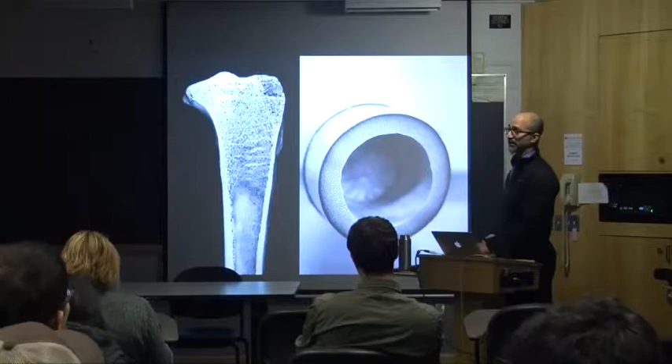So we set out to make a concrete that was variably dense. We had a number of different techniques to do that - partly using a centrifuge to change the density - but we actually ended up with a concrete that is variably dense just by pouring it. You pour it into a cast, and it establishes a variable density on its own.

That is all prelude to what I really want to talk about today, which is the urban metabolism work. The reason I show that prior work is because it became very clear to me as an architect that designers make huge decisions with huge consequences in terms of material flows. The material throughput of society that you can directly attribute to construction is about 60 to 70% of all materials that flow through society related to construction.

So designers, engineers included - how many engineers in the room, or engineering students? How many architecture students? Okay, you and me.

Designers make decisions within a context of resource flows, and it's rare that a designer really understands the full consequences of the resource flows they set in motion. As an architect, I'm very interested in that idea, and I'll return to it at the end. How do you educate designers to make decisions with an informed sense of the resource consequences, not just energy, but the whole material flow?

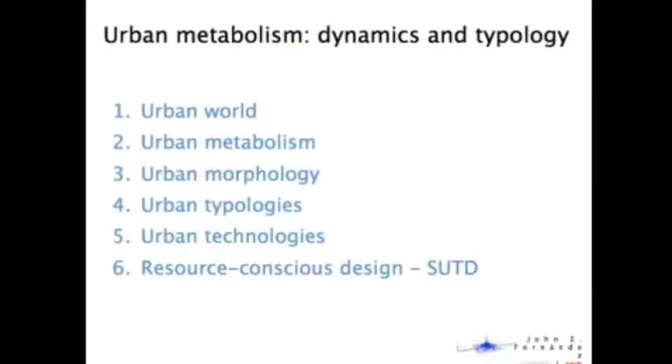There are six pieces to this presentation. I've got 78 slides or so, and I tend to move through them pretty quickly, so I want to spend just 45 minutes on the talk.

The first is the context of the urban world, and the motivation behind the work we're doing. Urban metabolism I'll introduce as the framework for the work I'm going to show today. Then I'll talk about two main projects, starting with urban morphology—how do you link urban form to resource flows?

The second project asks: do we have city types? Are there cities that are like one another? Can we derive a typology of cities based on their urban resource consumption? That'll be the second big project. I'll also talk a little about urban technologies, and the last piece is about education—a project I've been involved in for the last 4 years in Singapore.

First part: the urban world. Maybe some of you know this already—do you take urban planning classes? Anybody take planning or urban courses? Yeah, to some extent. Okay, so maybe you know some of this.

The increase in urban population in the 20th century, and continuing now, is just unprecedented. It's wild. The increase is also very uneven globally.

Asia, in absolute numbers of urban population increase, is really outstripping the rest of the world. This partly came out of thinking about construction—in 2005, half the construction in the world was in China, and it's pretty much continued since then. There are also significant upticks in urban population in Africa, especially in the poorest parts of the world.

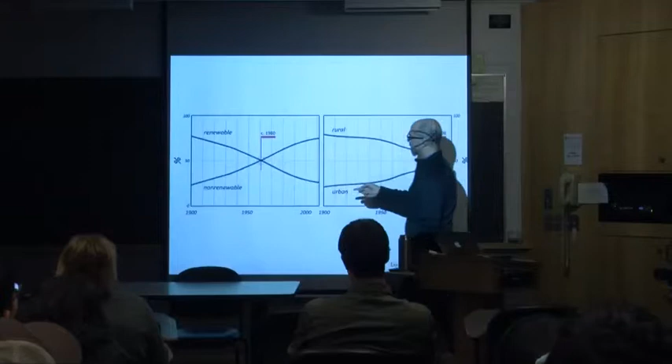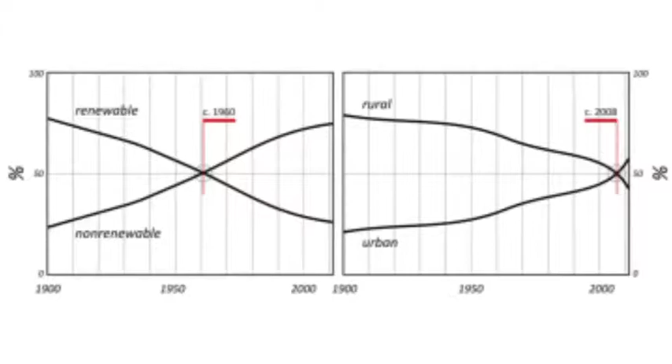We did a really extensive literature review, took about 9 months, and established that between 1900 and 2000 we crossed a threshold around 1960, where the material throughput of society—if you take all materials passing through and designate them renewable (biomass, flora, fauna) or non-renewable (metals and minerals)—shifted. We went from a substantially renewable basket of materials to a non-renewable basket today. You can argue why this happened.

A very strong element of that, I argue, and many others agree, is urbanization, because cities are made of substantially non-renewable materials—metals and minerals—infrastructure itself, buildings, all that stuff. So I wanted to really look at what this means if we're going to be adding a huge number of new city residents.

Just to give you some absolute numbers, to put this in perspective: at the beginning of the 20th century, 7.4 gigatons were extracted from Earth. That's the full weight of materials extracted from the Earth's crust. And at the end of the 20th century, about 60 gigatons—a huge increase in material extraction.

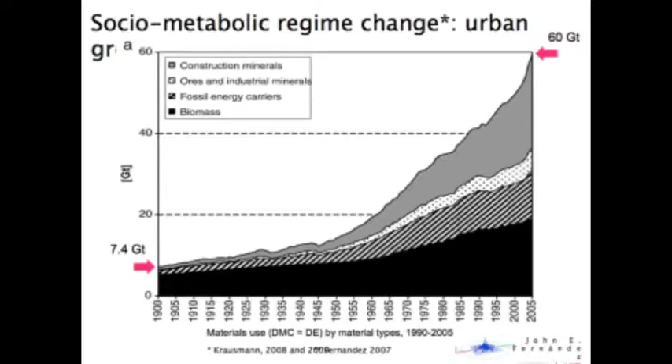If you compare that to the growth in the economy, the global economy actually dematerialized during that century. We created wealth with less and less materials over time, which is a really good thing. And that just happened—it didn't happen by any wholesale acceptance of a sustainable economy. It just happened because it's cheaper, easier, better, and technology generally drives in that direction. You develop, you're able to do more with less over time.

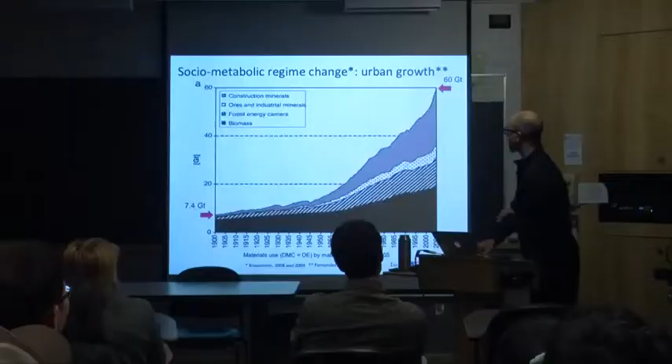So we wanted to investigate that in terms of cities. Now I've been talking a lot in terms of the globe and global dynamics and large societal dynamics, and we wanted to take that down to cities. We've been doing this work for about 5 years.

One way to think about cities is the same way we've been thinking about buildings, in terms of life cycles, in terms of lifetimes. What are the characteristic stages of the life of a city? This is quite an old diagram from 2007, but I've got a couple papers where we show this is actually happening—there are 3 stages in urbanization.

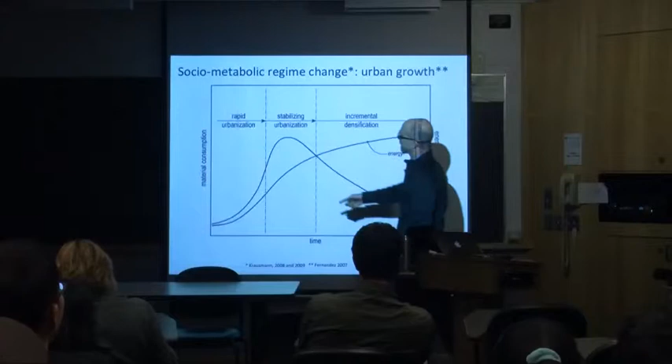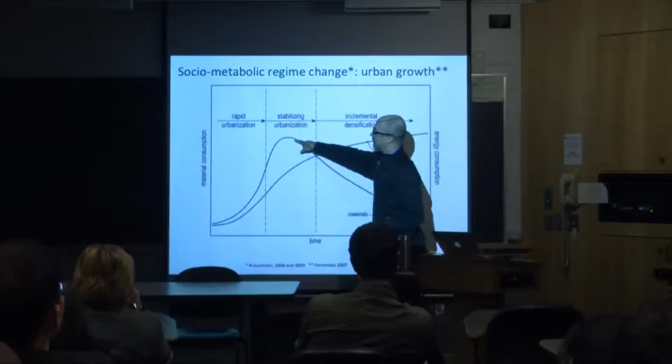A lot of it's common sense, but the first stage is rapid urbanization, or the founding of the city and the building of it—huge material input, and the associated energy increase as more people move to the city and it expands. Then there's a second stage, a stabilizing stage, where the physical extent of the city and the population stabilize, plateau, and the material input is still non-zero but it can plateau—it plateaus and then goes down.

The example I like to give is central Paris, which developed, redeveloped, was destroyed—but right now it's the way it's going to be for the next few hundred years. You're not going to see skyscrapers in the middle of Paris, right? So the population is pretty much stable—actually depopulated, like a lot of wealthier city centers, unfortunately. But the population is fairly stable, which means the material input, the actual amount of material put into that space, is decreasing over time.

Then the third stage is incremental densification, where the city just fills in the gaps. So I've described mostly material here, and what happens with energy is different—energy increases, and it increases through the stabilizing stage.

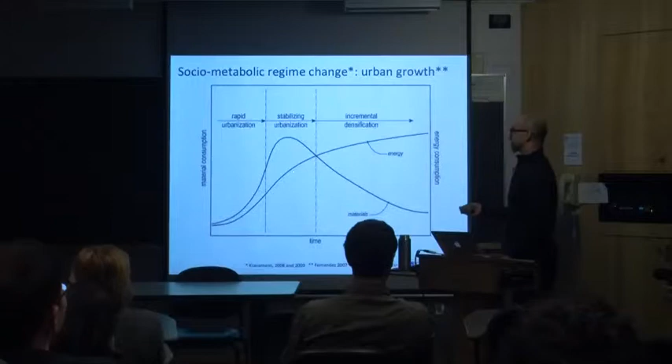The reason this happens is energy continues to increase when material decreases, because if the city is healthy—and that's the assumption here—and the population is stable, the city is doing what it does best. Every city does one thing best, and that is create wealth, create affluence. So as you create affluence, energy consumption almost always increases. In fact, it always does increase—we're not finding any examples where it decreases, really.

So energy increases, and maybe it doesn't plateau. I just want to add an addendum to that: just very recently, a colleague, Chris Kennedy at University of Toronto, has found some evidence for some Northern European cities being able to actually decrease their energy consumption while maintaining their economy.

So those were the three stages, and now I'm adding a pre-urban stage and a transition stage. The pre-urban stage is before the city, when you have hinterland production. The hinterland is the area or region from which the city draws resources, and hinterland production is highest when there's no city—no draw on it. It necessarily decreases because it's being drawn on, being degraded, as the city increases.

The last stage here is what everybody talks about: sustainable cities. How do we make that transition so that energy comes down, water comes down, and materials come down?

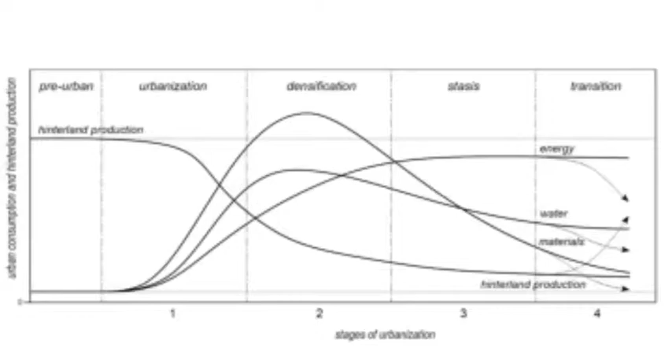Okay, so that's the whole prelude to urban metabolism. So you guys want to run for the hills at this point? Is this what you were expecting? Yeah, okay, all right, good.

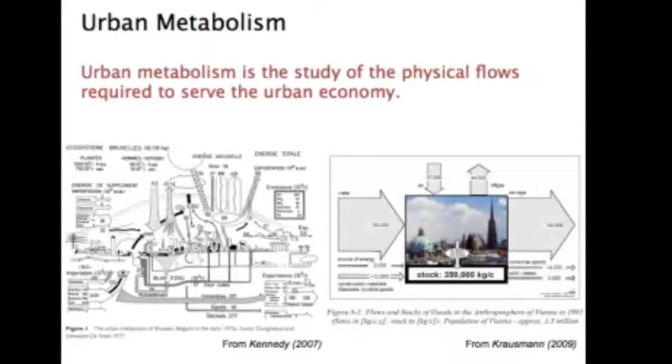So urban metabolism was a thing that we joined. It has its history back to about 1965. Abel Wolman wrote a paper in Scientific American, a thought experiment of 1 million people, and he posed the question: what do they consume? Water, biomass, whatever else. Urban metabolism came out of that as the field that studies the physical flows required to serve the urban economy. This is closely aligned with urban economics, and is basically the physical corollary to it. So what does it take to run a city?

There's a whole range of urban metabolism approaches. There's the full thermodynamic, material and energy flows approach, and then there's a more simplified version. I'd say my group, and the community in general, because there is a community of urban metabolists, is tending towards this simpler model because it's a little bit more actionable.

So some of the work we've done recently—this is just an example—is the actual urban metabolism for one year of Lisbon, Portugal. We did this a few years back. You have all of the imports, you have the additions to stock, so that's the infrastructure, buildings, anything else, and then you have the exports, the things that leave the urban system.

Just to give you some sense of the overall volume: a city like Lisbon, which is in a transition economy—and maybe it's taken a couple steps backwards in the last couple of years—but transition economy meaning it's between the agricultural, industrial, cheap labor, light manufacturing, and the service economy of industrialized cities, a person consumes about 20 tons per capita. That's very typical of a transition economy city.

Our interpretation of the master diagram, the material flow for cities, is this one. I really hesitate to put up this diagram, and I don't think I have any equations either, so at least I didn't do that. But the diagram is pretty straightforward. This is the urban economy, this is a system boundary for the urban economy, these are the inputs, and these are the outputs.

This shaded area is the socio-environmental interface. That just means the interface between the human world and the rest of the urban world. So in here is flora, fauna—literally birds and plants—and biogeochemical cycles, so rain and all the passive inputs, basically, right? Things we don't control, and passive outputs.

By the way, you guys live in a beautiful area of the country. I was just thinking today about Boulder, about this diagram. This is really intense in this part of the country. In Boston, it's not as intense, although... anyway.

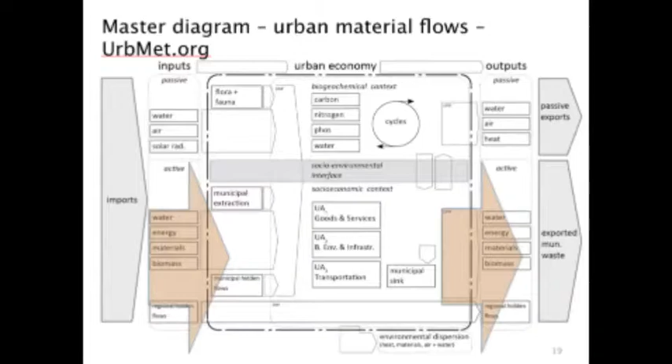The human part of the urban economy is this, so the active inputs, and all the ones you would expect: water, energy, materials, biomass. There's some regional hidden flows often. But the way to look at this human portion, the anthropogenic portion, is that, okay, so that's that economy.

And what drives this are the things that we want in a city, and these are the exact same amenities that urban economics identifies. If you've read any urban economics—Krugman, Fujita, and others—there are basically three things that cities provide, put in terms of amenities, firms, workers, and all that: goods and services, the built environment and infrastructure—urban economics makes a big point about housing—and then transportation. Urban economics says the city ideal is that as you become more urbanized, transportation costs go to zero; you can walk to work. So that's urban economics, the inputs here and the outputs there, okay?

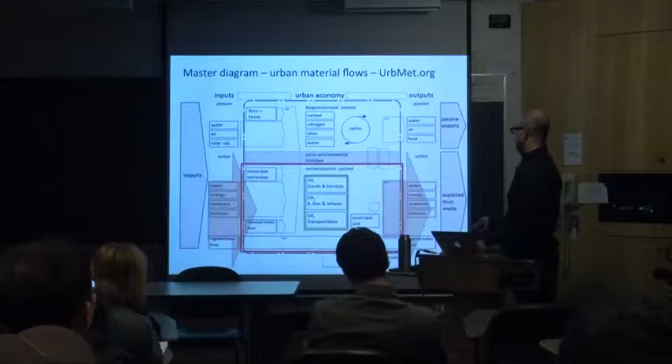So we are tying our physical flows with the financial flows already identified in urban economics. That's our diagram. As I mentioned before, the enormous resource requirements of cities regionally, nationally, and globally have to do with the fact that they add a huge amount of material that stays in place—this university, all the buildings, are going to be here for a while, right?

They're not going to go away.

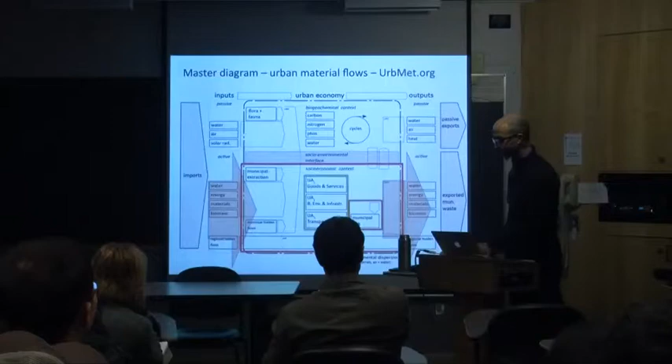A couple of different ways in which we approached a comprehensive sense of the resource requirements of cities is to begin to map the different elements of the city.

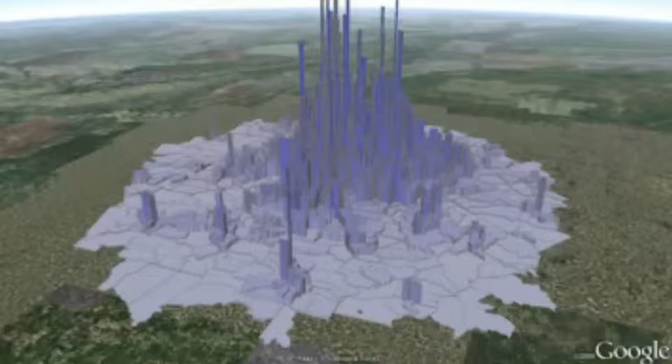What we do with that is we develop urban resource intensity maps. So this is a map of that same area in Atlanta, Georgia, about 25 to 30 kilometers in diameter, showing kilometers traveled per household to 19 services.

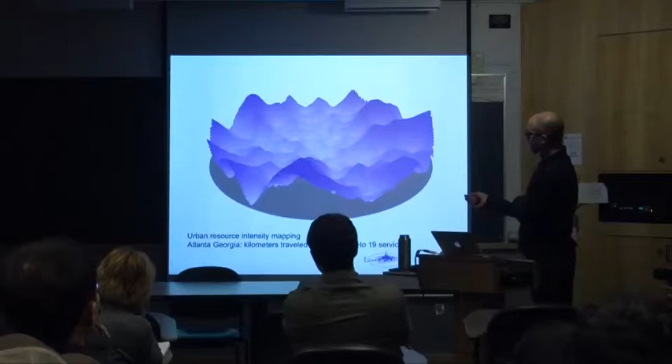The surface shows very low energy intensity in transportation in the valleys, and quite high mostly on the periphery. This is basically an inverse map showing that for denser population, your transportation energy is low. The interesting thing is that there are many areas pretty far away from the city center that have very low transportation energy.

And these are walkable districts. These are districts that have the sweet spot, the right mix of services and transportation mode choices. Okay, so that's partly what we do.

The second thing that we do is a little bit more traditional: the actual accounting for urban resources in one city. Again, this is taking those three activities - the inputs, the outputs, the urban activities driving that - the extraction from this city, and the additions to stock or the sink in the city.

And this is Singapore. Singapore is kind of a unique example that we use because it's a city-state. It's also an island, so international trade is the data that we can use, which makes it really easy compared to most other cities.

Sorry for the equation. Input plus extraction is going to equal the output plus the additions to the sink, and then the addition to stock. So the urban metabolism model basically says that this is a mass balance model. Whatever goes in comes out, right? So that's what we work with.

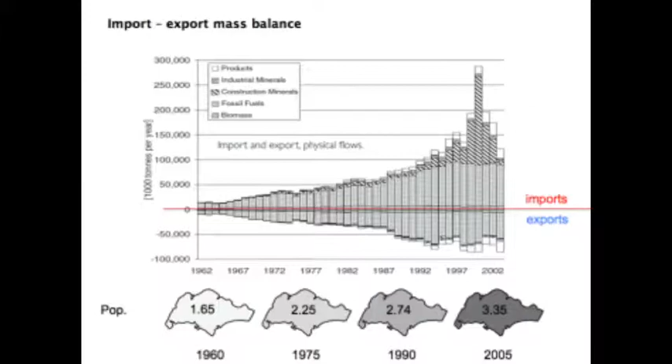Singapore is a great example also because the urbanization was, up until China started to urbanize, unprecedented. So the additions - these are imports and exports - Singapore is the first, maybe second largest oil refining city in the world. Exports have increased dramatically, but this is really an indication of economic development. Back in 1962 it was basically what was called a third world nation, and today it has the highest per capita GDP in the world.

We're developing these sorts of things because we want to be able to play out scenarios, global climate change and others. And we found a couple of things, and this is more general than just to Singapore. For example, we found that the different resources display different dynamics in terms of the growth of the city.

So this is domestic material consumption - all of the materials consumed by a city, the full basket. As the gross national income, a measure of affluence, increases, material consumption increases at some power, sometimes exponential, but at some power. Electricity almost always increases linearly.

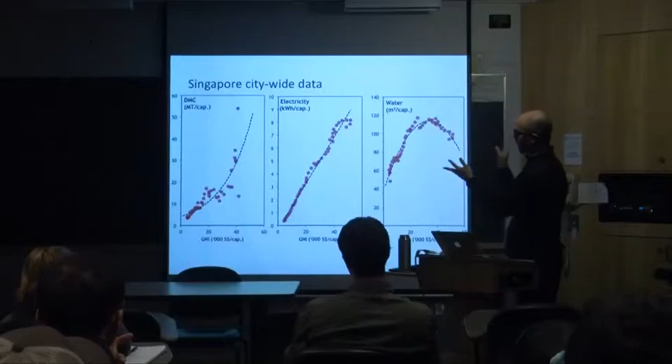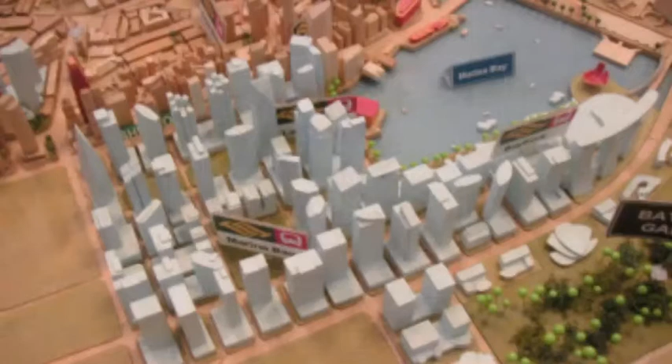Why is this important? Because in Singapore and in China and other rapidly urbanizing places - this is a model from the Urban Redevelopment Authority, showing in gray all the new construction that's planned, already approved.

Anybody been to Singapore recently? So you've seen this, the Marina Bay Sands. This is an old photograph, so this should be in brown color, but this is enormous - it's unbelievably large.

It almost, when in construction, looked like an oil refinery, frankly. It looked like a huge piece of infrastructure. This amount of infrastructure is unbelievably large. Singapore has asked us to account for the resource requirements of this sort of thing - what will it take to do this? Because they don't have any resources. They have to import 100% of the material that goes into every single one of these buildings.

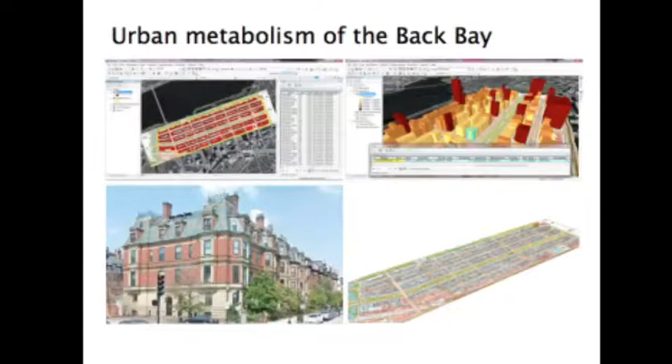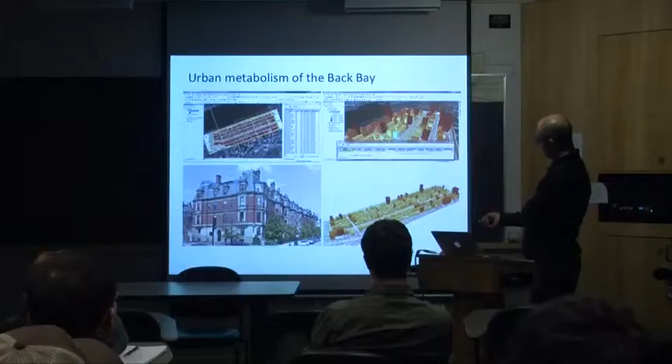So they're interested. We're also doing this work in the States. Very recently, we finished a complete urban metabolism model of the Back Bay in Boston. That's along the Charles River - this is the southeast edge of the river. This is the Back Bay, one of the most beautiful historic neighborhoods in Boston. I have two students who actually went and found all the information, doing on-site surveys to account for all the material already placed in this part of Boston.

The purpose for this is to investigate what it will take to make this energy efficient. So what's the material input? What are the resource consequences of deciding that you have, say, a CO2 emissions reduction target? That leads to this project.

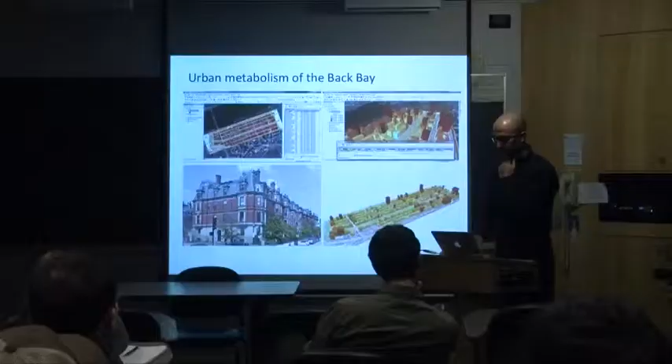All of that was - that's probably 10 projects right there that I've really condensed. All of that work was done within the first 4 years. And at the end of 4 years, we decided, well, we need to put some useful - we can do this work forever, but we'd like to put some useful tool online.

So we published this. Let me check the time - it's 4:04. Okay, I'm going to spend 10 minutes on this demo. This is online. My students, every once in a while, take it offline to work on it. But basically, let me take you back to the beginning.

You get this page, and you can enter a name. Currently, we have 44 American cities. We have 2 English cities, London and Manchester. We're about to finalize details on a project to put 500 cities into this around the world.

If I type in one city, New York, you'll get a Google map. You can then zoom in, zoom out. And the question we wanted to provide answers for: if I wanted to know, in some general, relative, comparative way, what the material and energy requirements of the city or a piece of the city was - how could I do that? This is the result of one 5-year PhD.

Someone asks: do you mean status quo requirements, or a scenario involving deep retrofits? No, status quo - what's there now. One question we wanted to get at in the urban metabolism work was to answer what we didn't think was out there: what are the resource requirements of cities today? Do we know what they are? It's a lot of disparate information.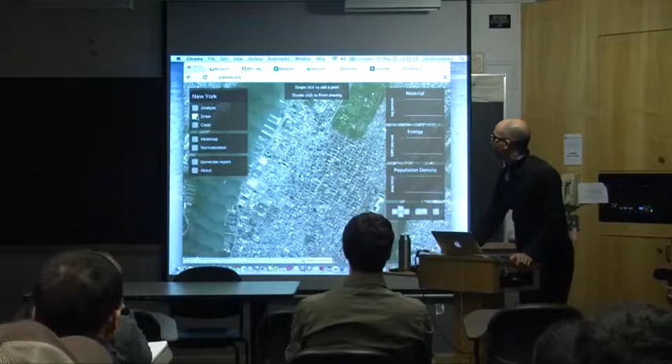In this analyzer, you can draw an area. Let's say - actually, let me do Midtown. The area doesn't really matter, and how precise I am in drawing it doesn't really matter, because the output is per capita numbers. So this is all normalized to per capita consumption. For this area I've delineated, I'm going to get material in kilograms per person, kilowatt hours per person, and then a population density.

So this is what I get, and eventually I'll get a population heat map here. These are the colors of the population - below 5,000 per kilometer squared, up to 25. For some reason that isn't coming up - oh, there it goes, okay. So that's a population heat map.

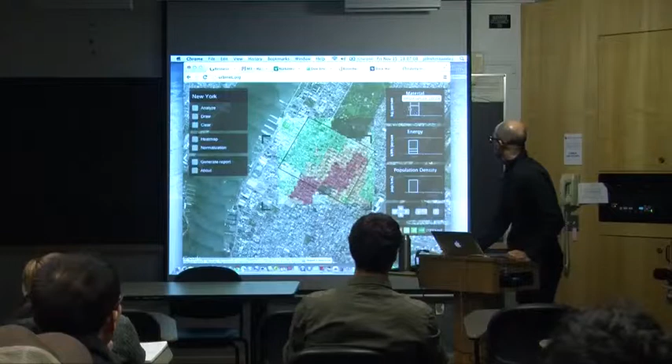So for materials here, if you were living here, you would be responsible for - or the city would be providing you - per capita about 60,000 kilograms in infrastructure and about 24,000 for buildings and materials. For energy, you'd be responsible for roughly 4,000 kilowatt hours in transportation, gas, and electricity. The population density here is 18,000.

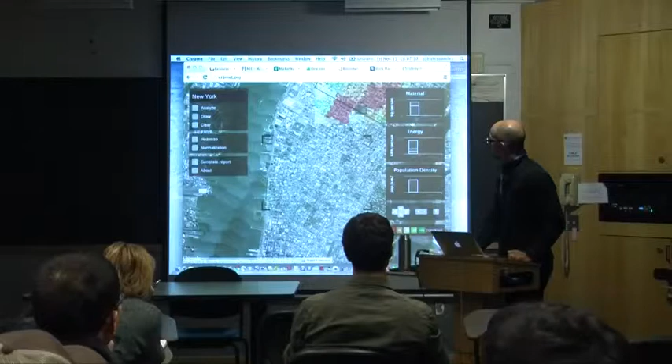So let's go a little further afield and say the West Village, which I believe is somewhere in here. Well, let's draw a large area, so including - okay, there. This granular population information is available.

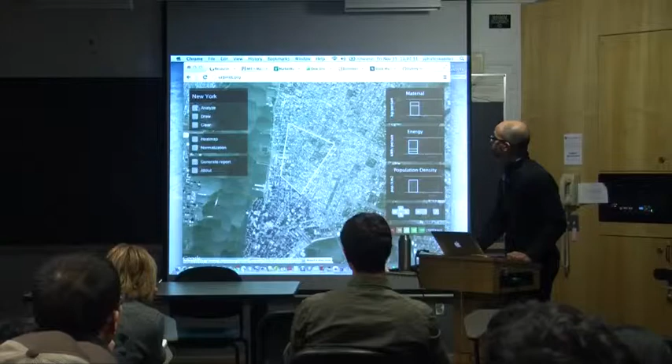Census data, yep. Is this inventory or throughput? Inventory - it's all in place.

So now the use of this is not the absolute numbers, really, in my mind - the use of this is the comparison. So look at the comparison: here I've got infrastructure of 5,000. I've got a bigger population, a more dense population. I've got much lower buildings and maybe less wide streets. Maybe there's more population per road network. And energy is also lower. So the point of this tool is to be able to go to different parts of a city, or even-

So now let's go - oops, let's do that. Let's go to Harlem.

I'm impressed with the speed of your network.

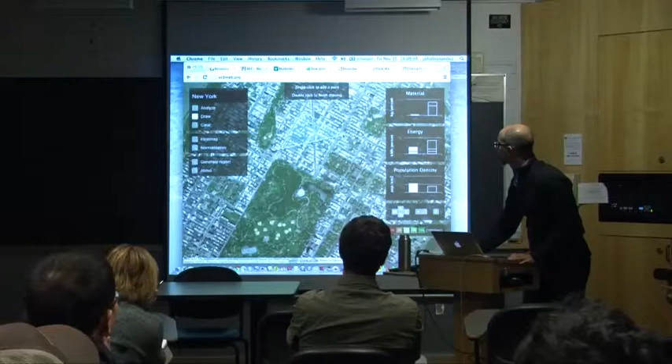Let's see what we get. So, analyze. Okay, so the previous one was West Village, for some reason not returning any material. So my student probably took off the database for Harlem here from material.

Energy a little higher, electricity definitely. Electricity is almost about 80% higher, and gas is actually maybe double. Population density is higher, so 42,000 per kilometer squared. That's a little unbelievable, but I think that is the right number.

Okay, so this is one, so this is an output from our work. I tell you, when we produced this, we spent all this time doing this. I was skeptical that it was useful, and then I actually presented it at an American Planning Association conference, and there was a lot of interest. And I'll show you what we did then.

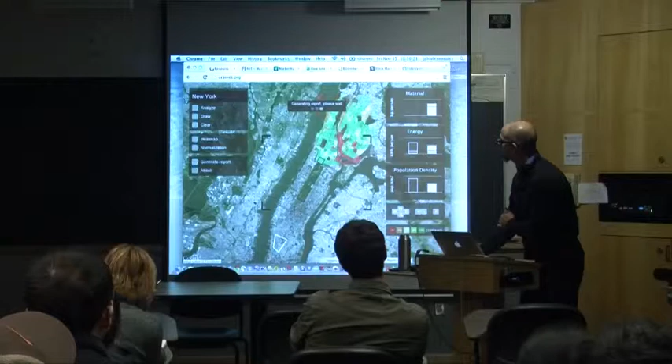Oh, actually, one quick thing I want to show you also is that you can generate a report. And this should come up pretty soon. If it doesn't, I'll move on.

How do you verify before you use the data, the census data? How do you know whether people in the city center, maybe more people actually fill out the census data than actually verify it?

Well, we are—do you normalize that? Well, we accept census data. Yeah, census data is pretty good data, actually. We accept that. So what do we do with the data?

There are two parts to this engine. Part of it is direct data-based, so there are databases that are maintained, and we keep that going. Part of it, though, is proxy data. So the PhD was all about taking the physical form of the city—building footprints, building-to-building distances, road areas, density of intersections—and predicting the energy and material through the energy and material in place of those things.

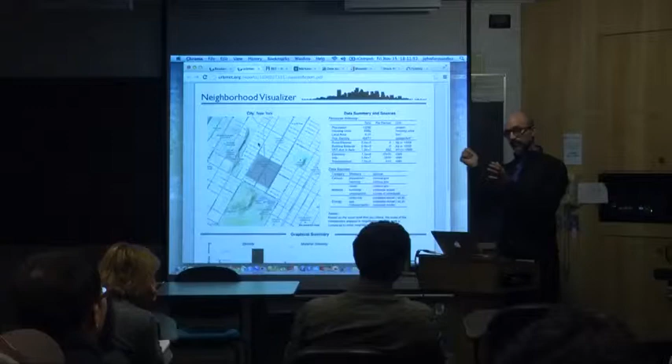And we did a lot of work to verify that that was correct, and we got within 10%, so the error here is about 10% for all of that. So we now know, and I'll show you the typology work. I'm going a little bit slowly, but the second big project I want to show you is a typology of cities. Now what we're doing is we know this city, New York, is part of one type. For all the other cities within that type, we can use a lot of the work that we do for this city for those cities. So I'll show you that in a second.

You had a question? By the way, this is the report that you can get, which gives you the actual numbers, gives you the data sources, and then gives you, in relation to other cities, population comparison, material comparison, energy comparison to other cities.

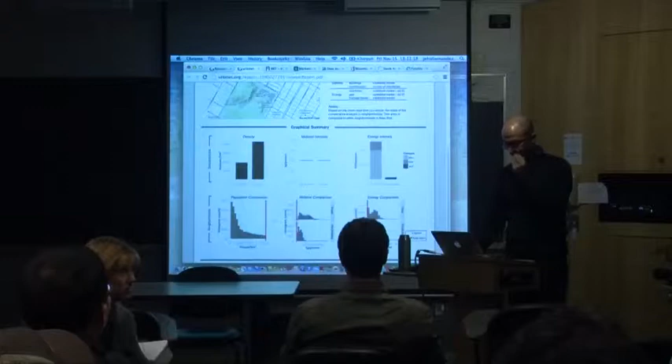When you take these snapshots, maybe you're overlapping between a predominantly residential neighborhood and a commercial neighborhood? Absolutely, people living—yeah, so that's where we are right now with the tool. So we don't include the flux in population due to work, to commercial. So it is people living there. Right now the tool is: if you live there, this is your material and energy consequence. So the next phase of the tool will be to include commercial and other ways of looking at it. But right now that's what we got at.

Yeah, okay, so I'm going to go to—so that was an image of the report, and I just want to show you a little bit what we gathered, some data. Sometimes I hesitate to show this because my student just went ahead and gathered this data from people who are using the tool. So this is where all the queries were coming from.

This is just, I think, in the first week. These are the actual outlines that people created of areas that they were interested in. So there's a huge range there.

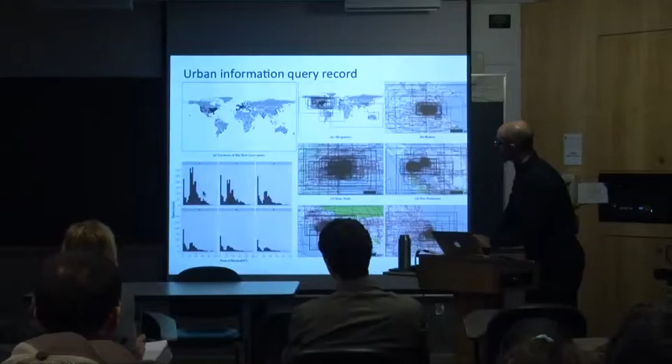And this is actually the next slide I want to show you—architect, engineer, and planner. When I presented this, the planners were really, really interested because they said there's nothing else that tells me intuitively, at least in a comparative way, how different parts of the city compare in terms of their overall resource requirements. And the thing we found, which was really interesting, was the area of inquiry was kind of bimodal: there was a pretty fine resolution, pretty small—kilometers squared—and then pretty large, people were looking at 30 kilometer square areas. Not a lot in between, and not anything above that.

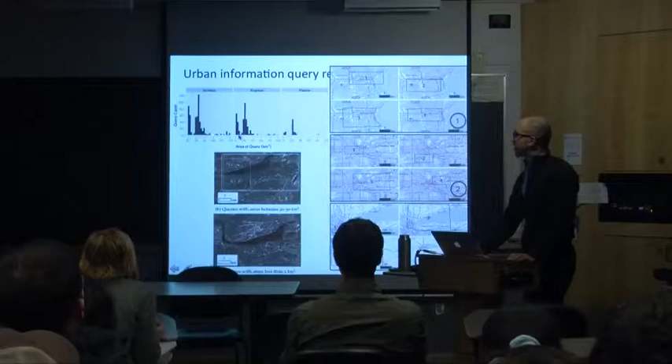And again, we mapped some of those areas. Okay, I'm going to have to move a little faster. Actually, I did want to say one thing.

The person who, with me, developed this tool over 5 years is David Quinn. Daniel Wiesman also helped him. They actually developed this tool, and we were thrilled to find there's a market for this sort of thing. They opened a company called Co-Urbanize, which offers urban data acquisition, processing, and representation to different stakeholders. Community boards and developers are the two main clients. They have one non-paying client, the city of Boston, which wanted pro bono work from a spinoff — a weird idea, but they're doing pretty well so far. It's an interesting new model for urban consultancy.

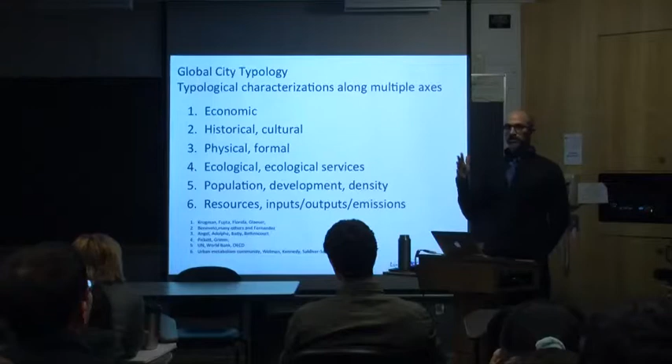The second big project, which I have about 5 minutes to tell you about, is urban typologies. The basic question we wanted to ask is, of the thousands of cities out there, if I were to map their urban resource consumption — how intensively do they consume energy, water, materials, biomass — would they group into clusters, or is it a smooth gradient between the smallest and the largest? There are other typologies that we know of, but we found there hasn't been one based on urban resource consumption, so it seemed like new territory.

Just an image of one of those typologies: global cities. Saskia Sassen made her career on this. The idea was we're tracking consumption, and it's a purely statistical analysis.

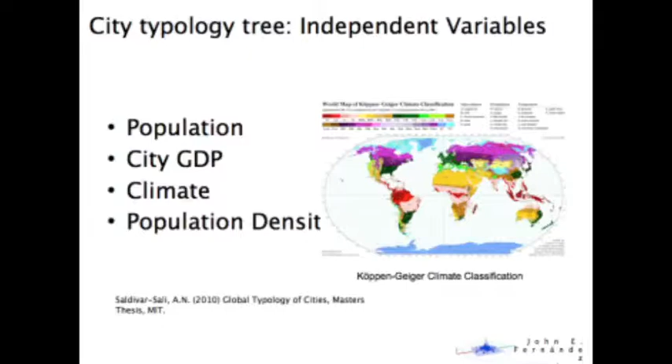We affirmed our results through case studies, and we arrived at this: we wanted to answer the question of how many variables — what's the least number of variables you need to understand about a city — to predict, for the most part, its urban resource consumption. We found that population, some measure of affluence, city GDP, climate, and population density were the four you needed. If you know that about a city, you can predict, for the most part, its urban resource consumption.

I would go into the method we used to get there, but if you have questions afterwards, I can tell you. The dependent variables are the resources we tracked — given those 4 independent variables, what do they consume in terms of these? These 4 are part of the material flow accounting methodology. We also added CO2 as a consumption proxy, and we did not actually track water.

So here are the results: biomass — paper, wood, food — fossil fuel, total energy, electricity, CO2 emissions, industrial metals and minerals, total materials, and construction minerals and metals. If you do the statistical analysis, the first phase results are 15 city types. Sorry, Boulder's not included here — we didn't include it.

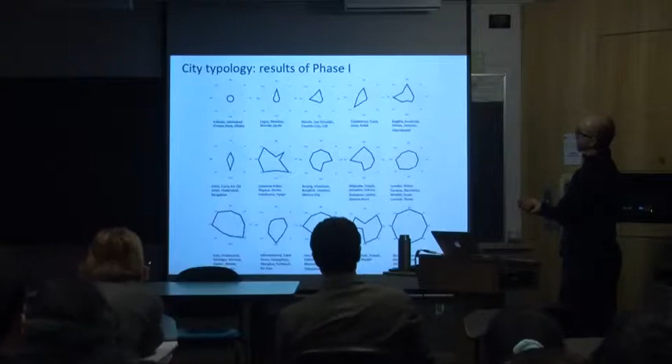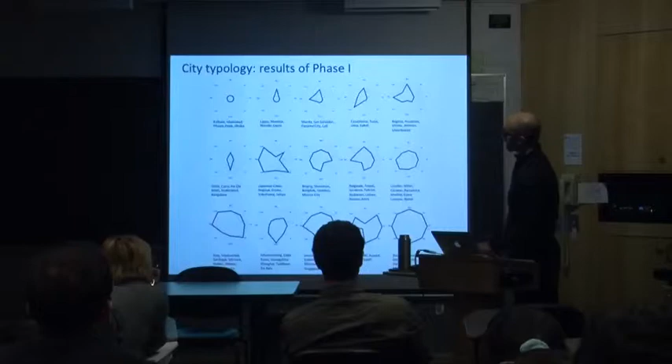From Kolkata, Phnom Penh — obviously cities in developing regions — to those profligate consumers of resources like Boston, Melbourne, Sydney — affluent cities. Some highlights: the most efficient cities are the poorest. Clearly not a model for the future.

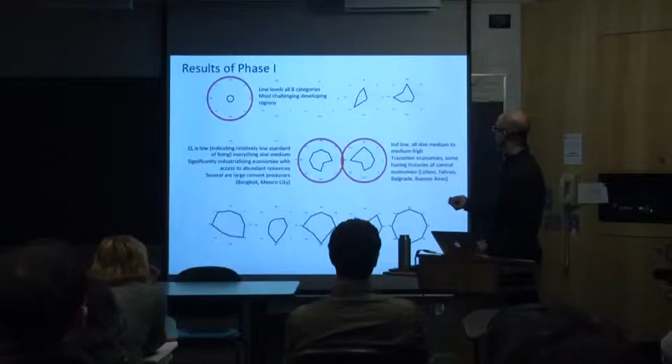The middle range is interesting because you get some things like electricity consumption being very low, with mid-range consumption for all other materials. Transition economy cities are an interesting model because they're actually fairly resource efficient — Lisbon, Belgrade, Buenos Aires fit here. Then you get cities that are fairly low consuming in lots of materials, except CO2 emissions are super high — these are coal-fed regions, so a number of Chinese cities fall in here. And then, as I said, the wealthiest cities in developed countries.

A transitions thought experiment is to suggest where we should go in terms of sustainable cities — what are the best models? The best models are not here, because these cities are resource efficient because they're underserving their population. They're unjust places to live. These cities, obviously, are not a good model either. So it's the middle zone.

Just want to highlight one type in this middle zone: Japanese cities. As much as we tried to put them into some other classification or include some city in their group, they're like no other cities in the world — a type unto themselves. It's interesting because they have high fossil fuel, high electricity, low biomass, low total energy consumption. They're actually quite energy efficient, but very, very high material consumers.

That's because you have a society that is, at least our speculation, quite resource efficient but highly, highly industrialized. Sorry for the graphics here, but the goal is to bring these cities up, bring these cities down, and the ultimate goal is to bring that middle zone down. So, some key publications — this work has already been adopted by the UN, much to my anxiety.

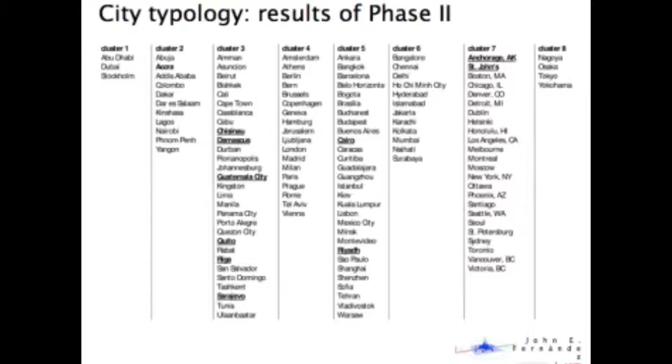We've gone through a phase 2, and I had a hunch that the 15 types were not so robust, so we applied a whole number of other statistical methods and came up with a clustering of 8. The Japanese cities still are onto themselves as a group, but a number of these groupings make a lot more sense than they did before.

Finally, we're doing a subtypology of African cities, and we're soon to start a subtypology of Asian cities. Okay, I think what I'm going to do is leave it there.

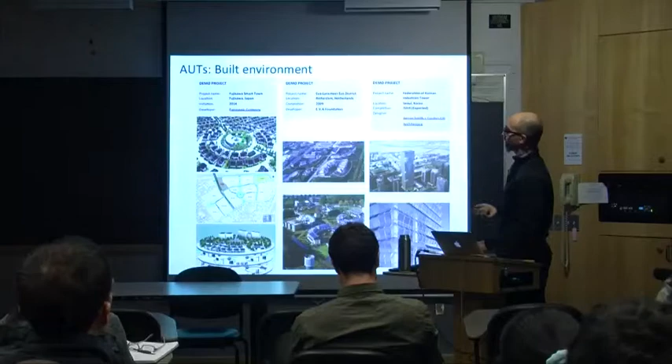Well, actually, let me just say a word about, given all of that, what do you do? There's been a lot of talk about urban technologies or new ways of doing things, so we've developed this whole report on alternative urban technologies. We've developed a few of our own recently, including some design here.

The last thing I'll say is the last couple of slides. I mentioned I wanted to talk a little bit about education. The main point I want to make is that all of the work we've done is centered on the idea that design decisions need to be placed in a more informed context for resource consequences. That's the point. We are absolutely not educating our designers today to be able to do that, even though there's life cycle, there's energy modeling and all that, but we've got a long way to go.

I've been involved in a project to set up a new university in Singapore. I was the head of the architecture department there for the last few years to set it up. This is a rendering of the new building in Singapore on the east side of the island. It's a university for 10,000 students in steady state, with 4 departments, one of them architecture.

In this region of the world, architects and civil engineers are in huge demand. It's a huge amount of building over there. So we threw out all the assumptions about architectural education and decided that what we would actually educate are designers who understood the resource consequences. So the name of the department is Architecture and Sustainable Design. It's a very different kind of education.

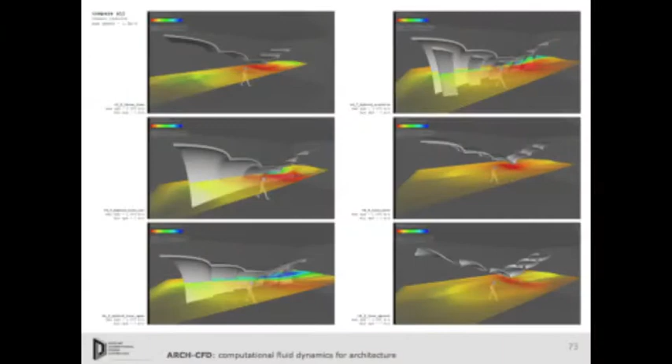The other thing we did, at the very beginning of the undergraduate curriculum, all students take an introduction to design class. So all the engineers and architects learn about design and different methodologies in design. The capstone becomes another version of that in the end, and basically it's all about designing with resources in mind - how do you, at the same time that you're designing, have a sense of what the resource flows are?

Apologize for going so quickly in the last little bit. Thank you. Do you have any questions? I'm sorry I didn't leave much time for questions.

Could you leave the second to last slide up a little more on that? No, one more.

So I see you have dynamics, linear system - yeah, so all the students take all of this, including the architects, right? Here's the thing: we were just talking about this - everywhere, architecture students are a self-selected group, of which a certain portion doesn't really like this stuff, let's just be honest. But if you can get the lion's share of that self-selected group to at least be knowledgeable about this, they can then talk to the engineers who frankly don't really want to know about aesthetics and precedent and form. If there's enough of a common language - and that's really the key takeaway from my experience - language and experience, those two, are super important.

The other example I was talking to John about earlier is that some things architects do, we've brought down into this Introduction to Design class. For example, the continual feedback loop with your peers - architects go in front of their peers and they do a pinup.

You know that, right? Have any of you been to pinups, reviews, architecture? With their peers, with the faculty there, that's a continual feedback loop. And it's crowd-sourced information, basically.

The engineers now are like, wow, this is great, this is fabulous. Well, by the way, we've been doing it for about 300 years, right? And the engineers now want to do that kind of thing. Whereas the architects know that there are some quantitative design methodologies that we don't use, we don't talk about, we don't even want to get anywhere near them, that engineers use that actually would probably benefit architectural design.

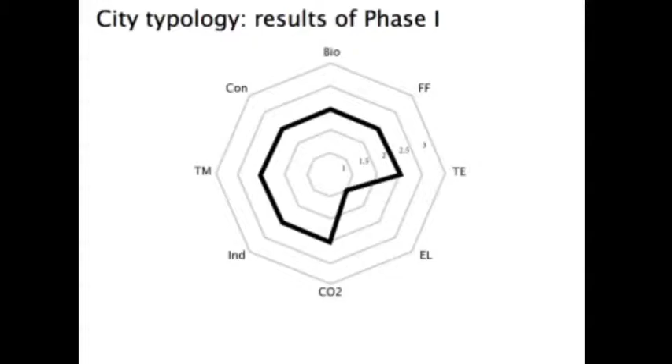So it's interesting. One way I answer that question - not exactly that question - but part of my contribution to this whole aspiration to green cities is to provide a scientific basis for actually knowing whether we're doing better or not in the future. So if we have targets, whatever, part of the answer is: so how are we doing now, right? And then the typology is just physical stuff.

I know - I'm interested, I'm an architect - on environmental justice, governance, institutional robustness, all this stuff is there, absolutely. And it's deterministic, it's important. But I don't cover it because my contribution is just going to be in the physical stuff.

We've started as a group having some really interesting collaborations with the non-urban metabolists who tell us, oh, this is interesting, these two types are because of colonial, long-term colonial occupation or whatever else. That's interesting, but we're just starting to enter into that discussion, and I'm not a historian or a sociologist, so I wouldn't ever want to say I know about those things. It'd be really interesting because maybe the typologies kind of supersede that, and maybe we realize that current metabolism says maybe more than historical context.

So one of the most interesting conversations I've had recently is with Jim Wescoat, who's a person at MIT in the Aga Khan program, and he's an expert in water. One conversation we had was all about the culture of reuse. In India, for example, there's - by necessity, but now just by culture - everything is reused. And how do you transition Kolkata or Mumbai, the poorest parts of Mumbai, to retain that culture of reuse by formalizing it, but still creating affluence, right?